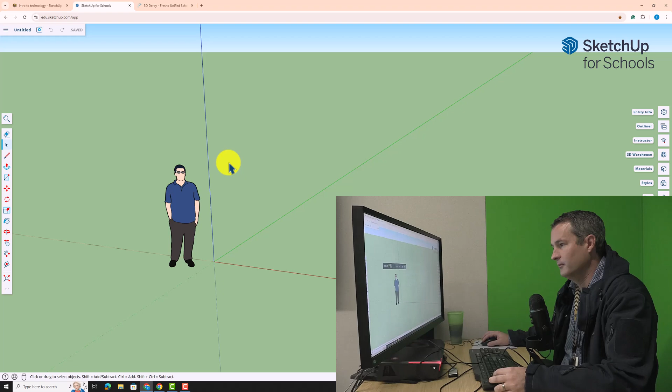To get to SketchUp, we'll log in with SketchUp Education, and once we're there, we're going to make a new document. That should be in decimal millimeters. Once we're here, I'm going to get rid of that person.

I'm going to show you some specifications for this project. This is what we're really focusing in on here, car dimensions. These are the maximum sizes, the biggest that your car can actually be. There's nothing good or bad about those sizes until you get to look at the size of the track, and then you understand where we're coming from.

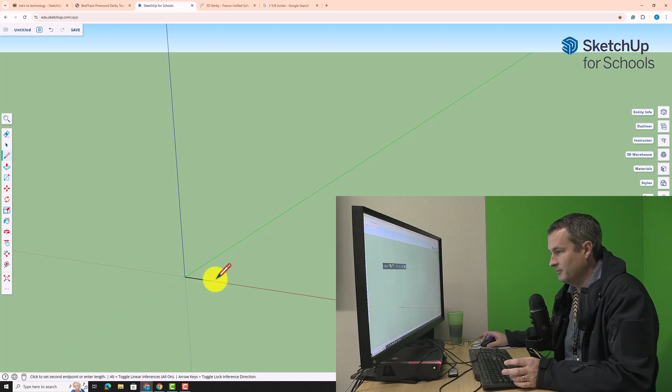The biggest thing we look at is that the distance between this rail and this rail, where the wheels have to sit on the outside of, is 1 5/8 inches. I'll type 5, then the quotation mark (shift plus the button next to enter), then press enter. That makes a line 5 inches long, which is important because 5 inches, or 127 millimeters, is as long as the car is allowed to be.

Then I'll come up a little bit on the blue axis this way and a little more on the blue axis this way. I'll make sure my car is not more than 51 millimeters tall, so I'm going to come up here, and I don't want it to be 51 — let's say 39. It doesn't matter.

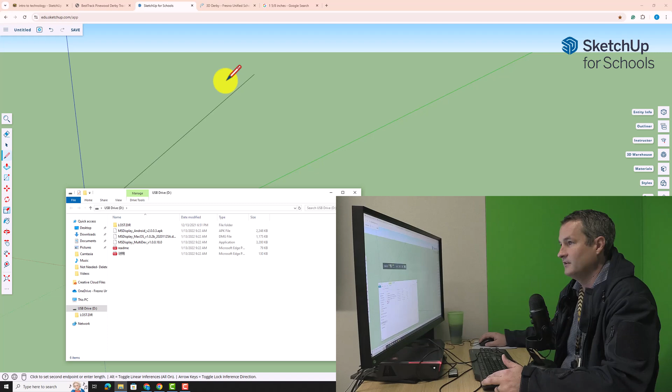There's 40. For the shape, this is kind of up to you — I'm going to make a curved top, going from that curved top using a 2-point arc, just making it something like that for the shape of my car. There are lots of different options you can do, but what I'm having you do is just make a side plane piece of your car.

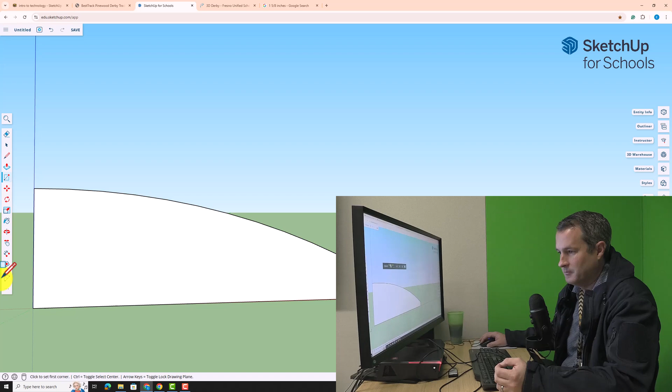Then we're going to create small holes, about 1 millimeter in diameter. I'm going to zoom in — the radius, around 1 millimeter, is great. This is going to end up being where our wheels are going to go, so you see that red line there.

I'm going to do the same thing up here — I want it to be 1 millimeter. Now I've got kind of the shape of my car.

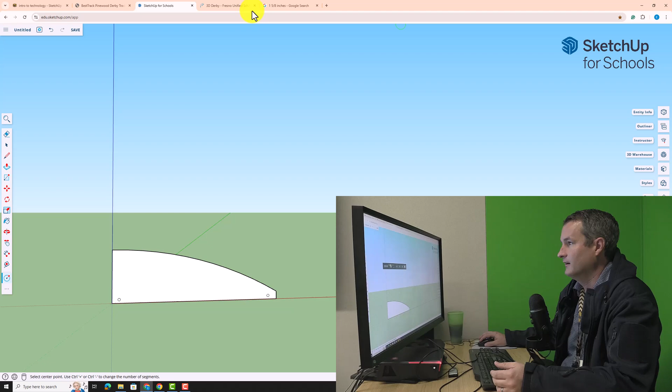Next I'm going to go back and look and say, okay, it could be up to this wide, but I don't want it that wide. What I actually want is for it to be just big enough to go over the track, so the car can sit on top of this track.

I don't want this in inches — let's go to millimeters. So it's going to be 41, 42 — I'm going to say 41 millimeters.

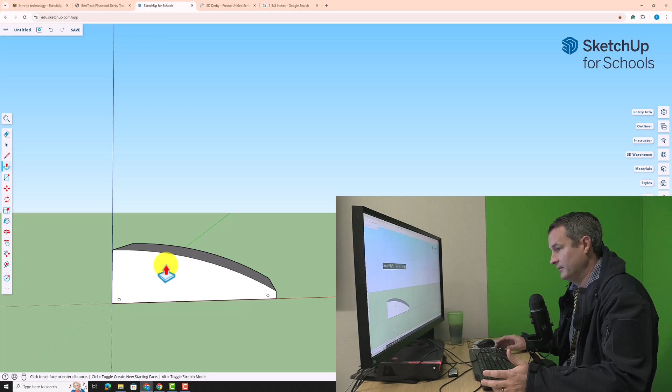I'm going to use push-pull and pull this out this way — 41, typing it in now on the keyboard. You saw me, 41 millimeters, and press enter. As soon as I do that, I've got this nice little car here.

This is kind of what I'm looking for your car. Then, because we did not push-pull these axle holes, I can just click that outside part and delete it. Now we can see they go all the way through to the other side.

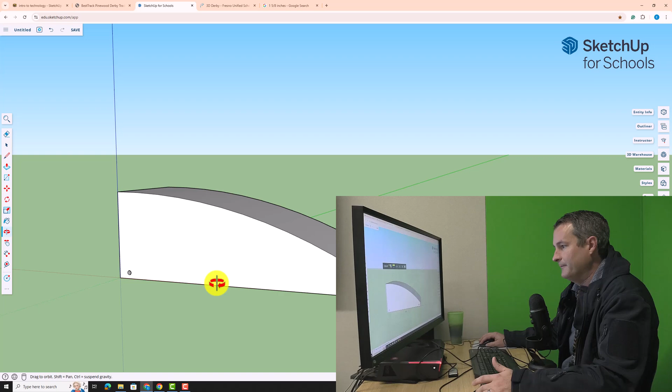So now, what do you want to do to your car? I would say add your name to it — there's that 3D text tool, add your name as a license plate. You're also welcome to go to the 3D Warehouse and add some things to the top to make it look fun. This is your second car, but it's really going to be your first because this model is going to just work.